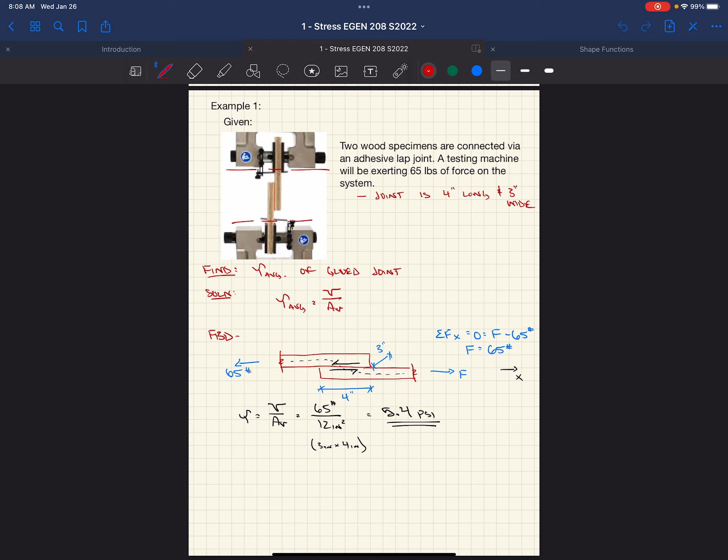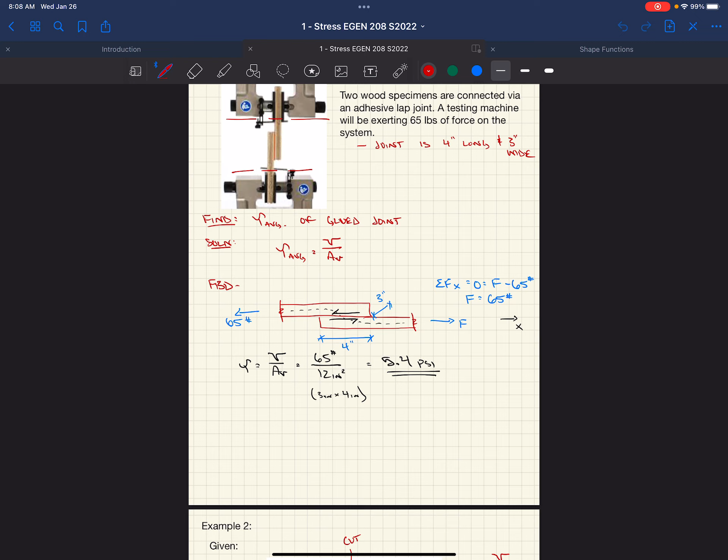All right, so on Monday we started talking about shear stress, right? The intensity of the force parallel to a cross-sectional area. Normal stress is the intensity of a force perpendicular to a cross-sectional area, okay? We went through an example. We had a couple glued pieces of wood glued to each other, with one shear plane, one location with which we have transfer of force parallel to a cross-sectional area. We calculated that we had 5.4 psi of shear stress, average shear stress, because we're assuming it's uniform over the entire cross-section, that entire area.

Then we started this example, which was a clevis. As I mentioned, you can find a lot of them in the engineering building or other buildings on campus, okay? We were asked to find the shear stress in the bolt.

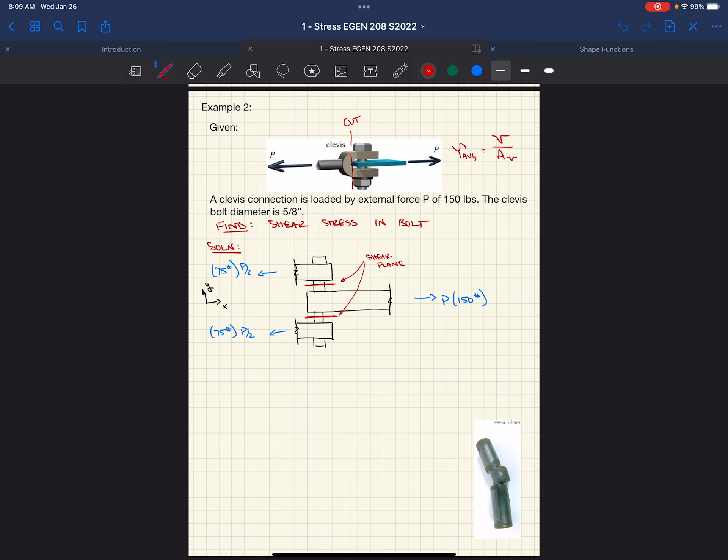So in order to do this, as we do in most of our mechanics of materials problems, we do a free body diagram, right? We need to know what the internal force is. That internal force then allows us to calculate the internal stress, or the intensity of the force, based on the cross-sectional area over which it acts.

So in this case, we drew a free body diagram of our clevis. I cut the clevis so you could see this force transfer through the center plate, right? We have a full force P. And as we run through the clevis, well, we have two sections of clevis. Because we have symmetry, these forces get split in half. So we have P over 2, or 75 pounds, acting on each of the legs of our clevis.

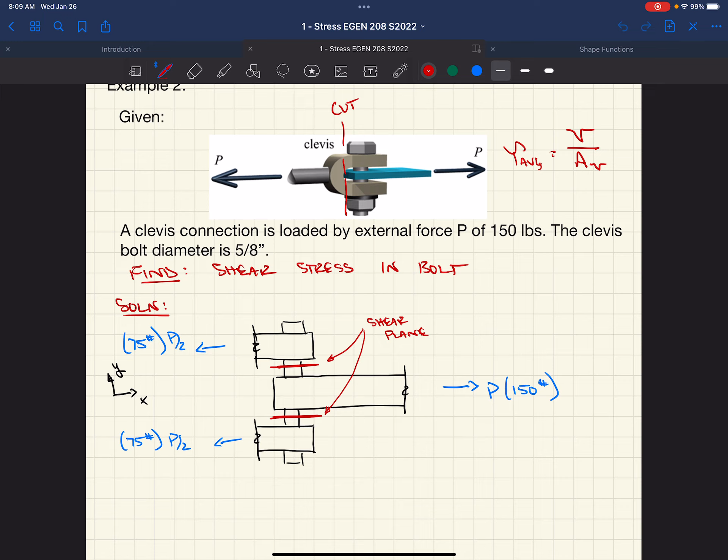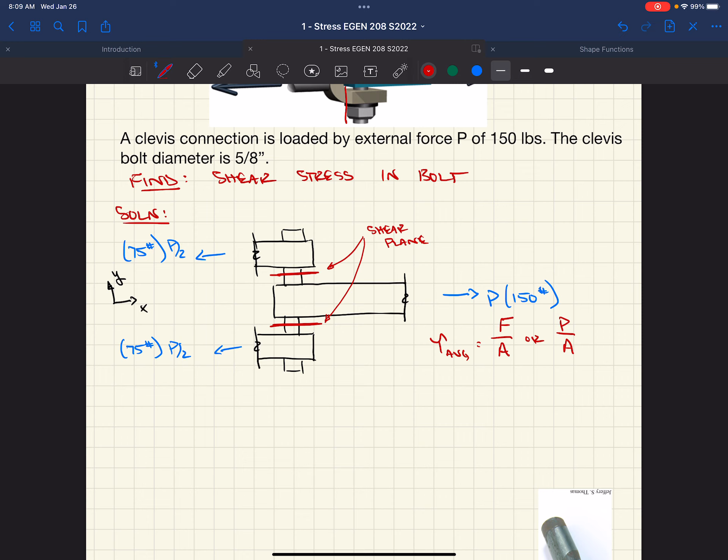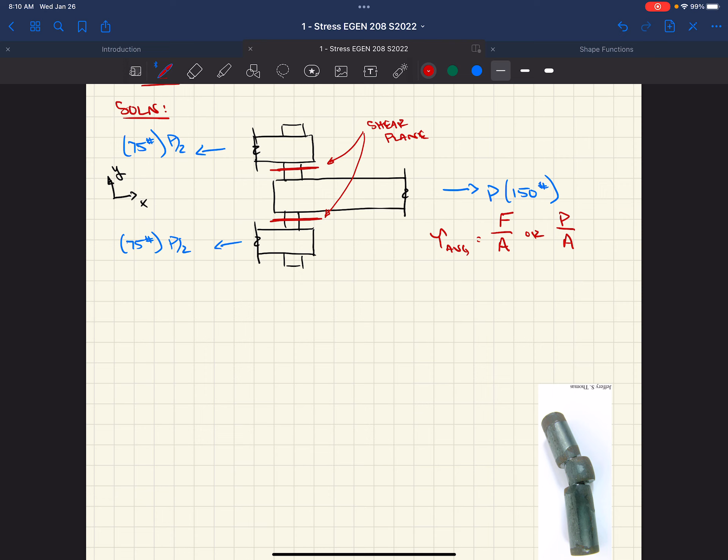From this point, right, now we have forces. We were given the diameter of the bolt, so we have area. We know we need to calculate shear stress, or P over A, right, force over area, the intensity of the force, stress. So we can calculate this in two different ways, right? We can calculate it with respect to the force being this P over 2, or the force being our entire P. Why is that? It's because we have two shear planes, so we could either cut out...

Another free body from this diagram. Right, cut off one of the legs of the clevis, and we're looking at what's going on right at our shear plane. We would have our force P over 2 trying to shear that bolt off. See if we can find a different color, right? Or we could look at a different free body, right, and look at both of our shear planes together. And hopefully we should get the same answer.

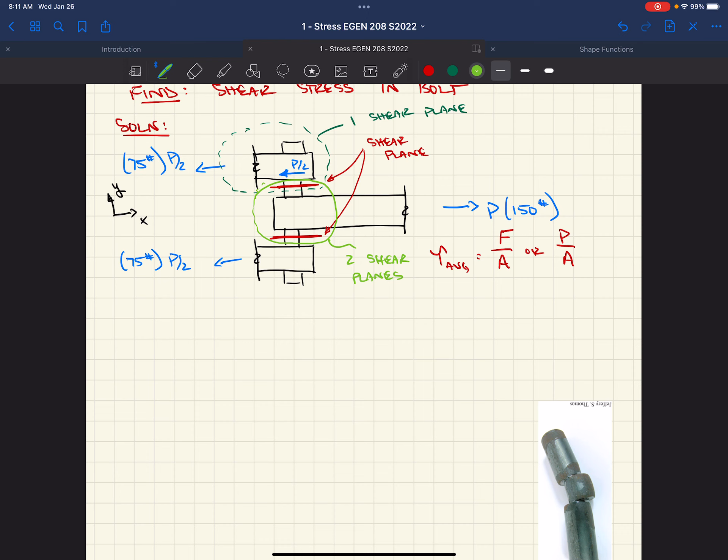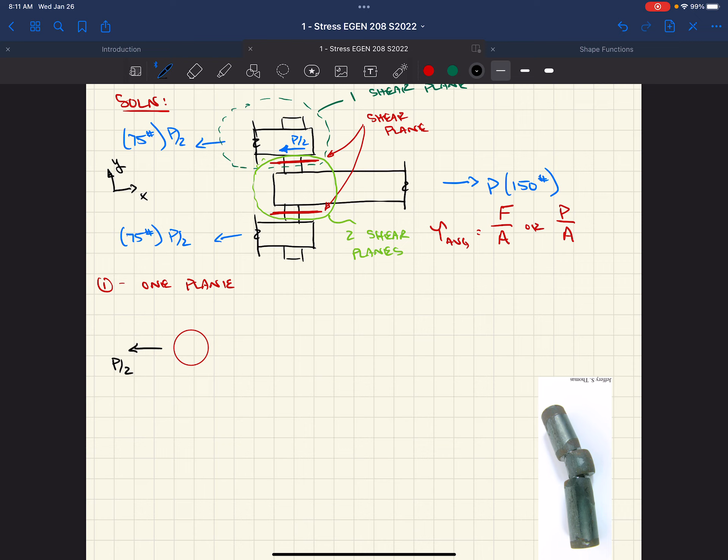All right, so if we look at first, right, one shear plane. Our free body diagram that we're looking at is that upper one, that upper circle there. If we looked at a cross section, right, we're going to have our force P over 2 acting on the bolt, right? It's our P over 2 that we calculated before. The bolt itself, it needs to resist that, right? So we've got a P over 2 acting on the other side of the bolt. That's our other P over 2 acting right here.

Something like that, right? We know the diameter of this is 5/8 of an inch. So now we have our force and we have our area. We can calculate our shear stress, tau, which would be our force, P over 2, divided by the area. If we know the diameter, it's pi over 4 d squared, which gives us 150 pounds, that was P, divided by 2, all over pi over 4 times 0.625, 5/8 of an inch, squared. We get 244.5 PSI.

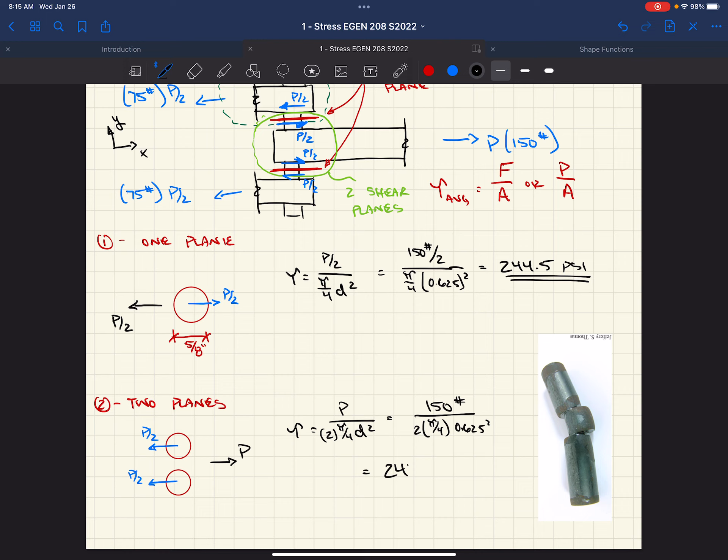So in this case, again, now we've got tau is force over area. Well, now we have our full P load, but now we have two shear planes. So we have 2 times pi over 4 d squared, which is 150 pounds, divided by 2 times pi over 4 times 0.625 squared. What do we get? We get 244.5 psi.

Right? So as long as the free body diagram is appropriate, yeah. Where are you getting the pi over 4? So the area of a circle with a diameter d is pi over 4 d squared, or it's the same as pi r squared, but you could do it with the radius. Not as popular of a method to calculate the area of a circle, but yeah, if you were to substitute 2r into pi r squared, you'd have to divide by 4 to get rid of that 2 squared, which was 4. So yeah, it's just force over area, as we've talked about, to get the shear stress.

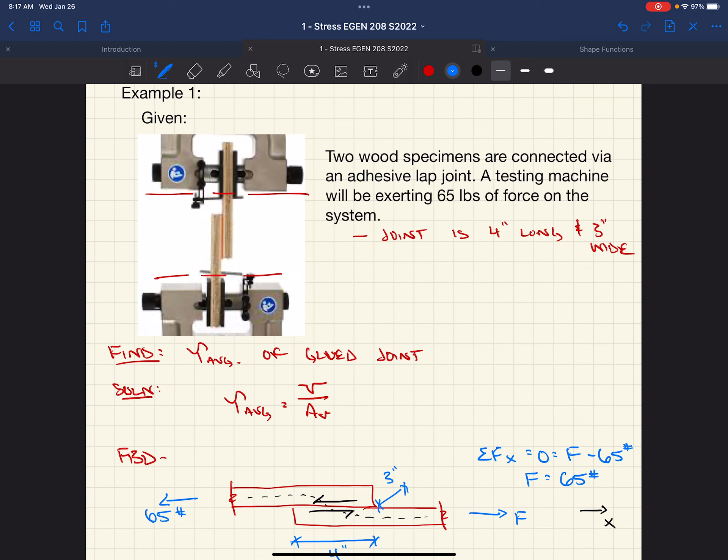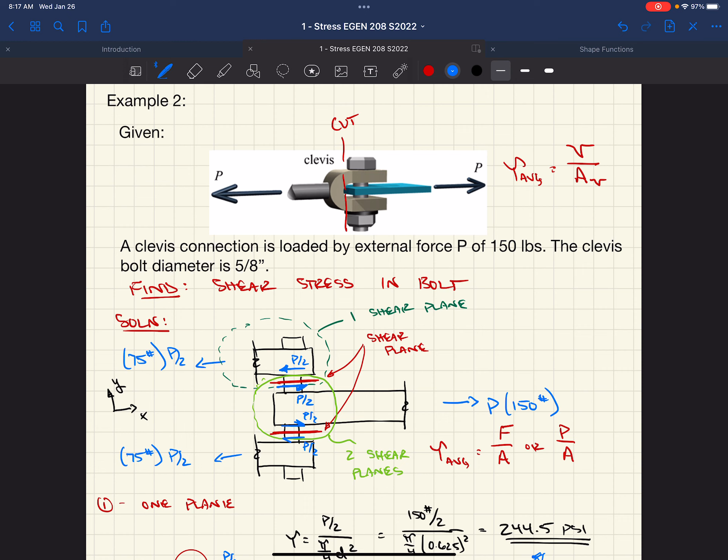You can either look at one of the planes, right, or you can look at both planes. In some cases we have only one plane, like our first example. This would be a single shear plane across the 2 pieces of wood. But as we looked at a different type of configuration, we've got 2 shear planes acting in this. You would say that this bolt acts in double shear. So this would be a double shear failure.

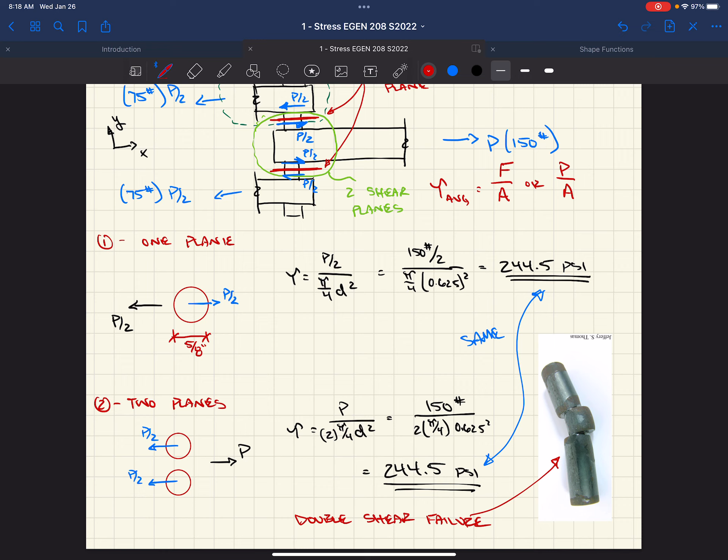You can imagine this clevis is acting on the outsides of this bolt, right? The plate is acting in the center. If you pulled hard enough, the stress is the same on both, so it should fail at the same time. It would just slide that inner piece of the bolt out from between the outer pieces, right? So that'd be a double shear failure.

In the homework, this is a type of connection that's in the connections on the second problem, okay? They're all double shear connections. So that means you have 2 shear planes, right?

Any questions about that? Yes. Can you just explain the cross-section free body diagram again? Just like the forces, on the single shear versus the double?

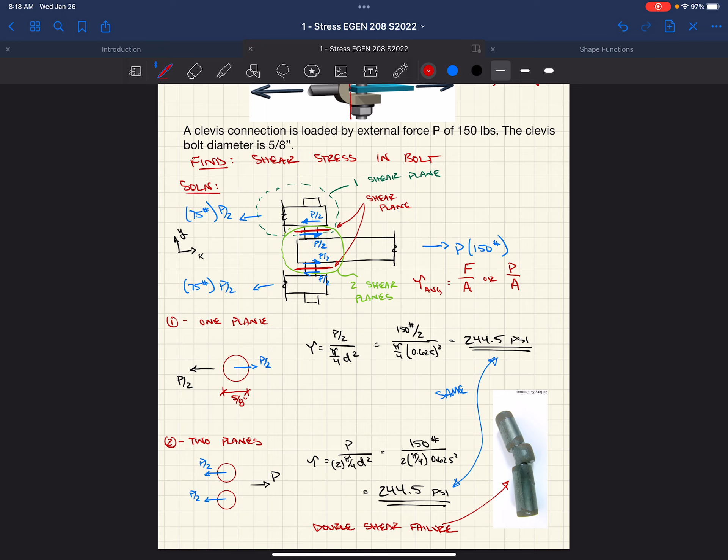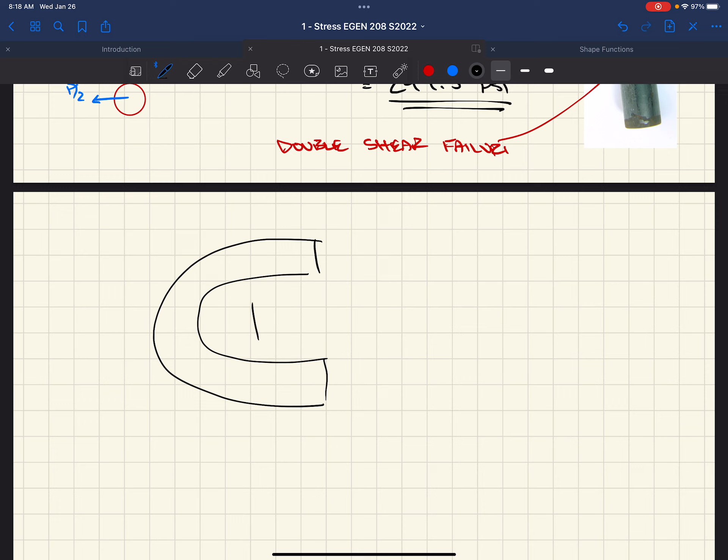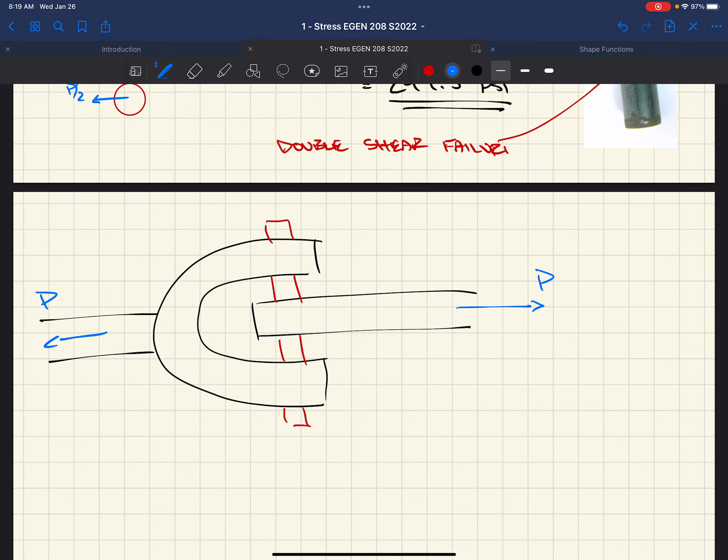1 and 2. Yeah. So if we looked at this, this is our clevis. This is our plate. And we had some sort of pin or bolt putting these 2 together, right? And we'd have some sort of load, P in this case, was our 150 pounds. So to pull out a free body diagram, we could legitimately cut this anywhere we wanted, right? That's the essence of a free body diagram. You're pulling out a free body, and you're imposing on that free body the forces that are acting on it externally. So this is a free body looking at the entire clevis connection assembly, okay, which has forces on the left equaling the forces to the right. So this thing can't move anywhere, right? If you did sum of the forces in the x. So anywhere that we cut this, we still have to maintain that same equilibrium.

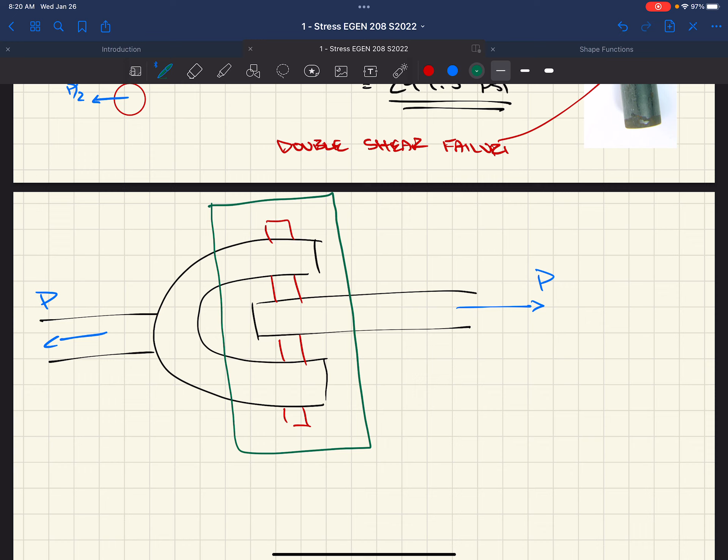So if we were looking at what we did first, we cut out this section. We'd say this is our free body diagram, number 1. And when we cut that out, it looked something like this.

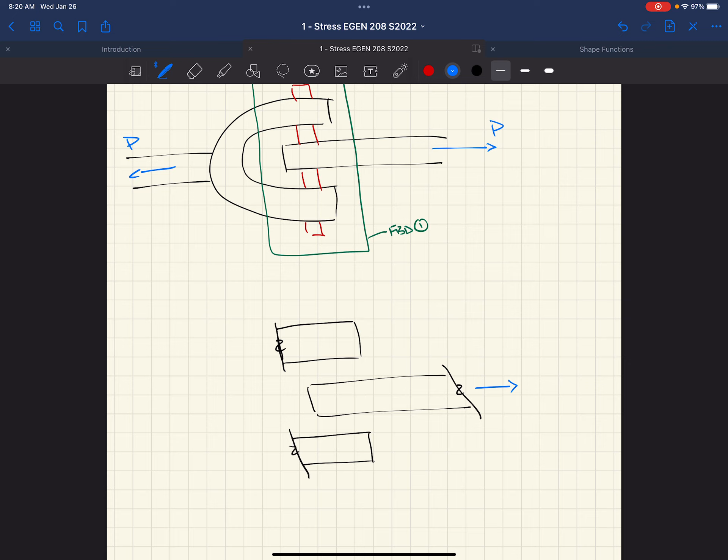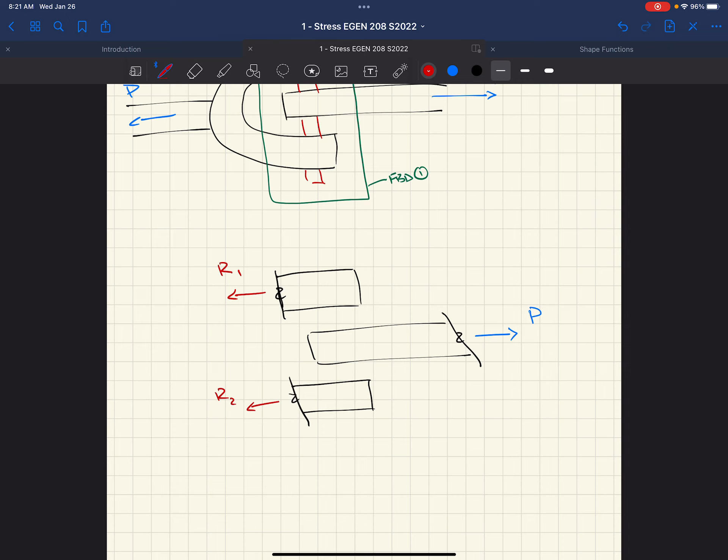Now we have P on the right-hand side, right? We know what that is. And then we have two internal reactions, right? We have two forces that are going to be in the yoke of our clevis, right? If we cut that clevis off right there, there's going to be some sort of internal force in the top section and the bottom section, right? So from there, we know we've got our bolt sitting here. We have sum of the forces and sum of the moments, right?

We need a coordinate system here, which I did not put in. I'm going to do X, Y, looks something like that. Okay.

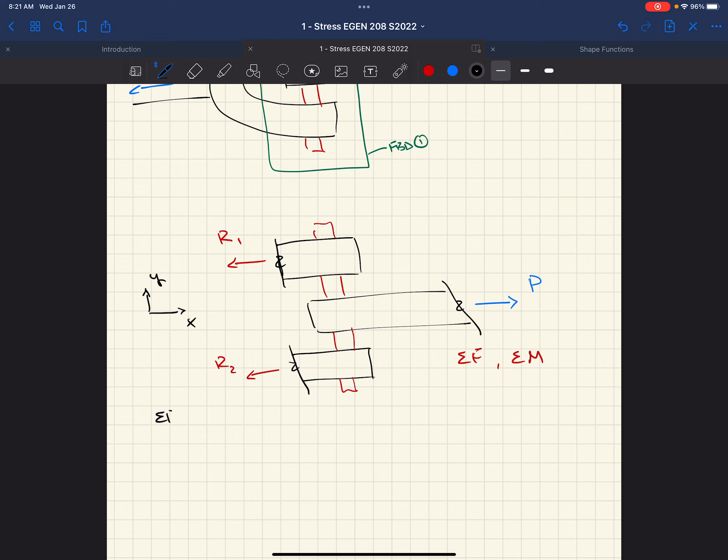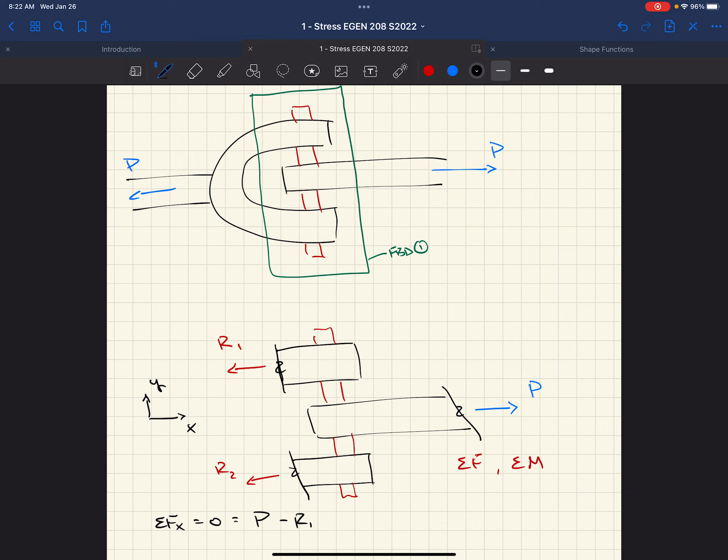Well, our forces are all acting in the X direction, right? So if we did sum of the forces in the X, they must equal 0, just like they equaled 0 in the overall free body diagram. So we got P to the right. Our coordinate X is positive to the right. We've got R1 to the left, right? So it'd be negative. And R2 to the left.

So we know what P was. We don't know what R2 and R1 were. All right, so we need an additional equation. All right.

So we need to use sum of the moments. So if we drew a line through here, right, we would have some sort of distance x that separates our two reactions in the yoke with the reaction in the plate, right? And the sum of the moments about any point on this free body diagram have to equal 0, right? And so I would say sum of the moments about, I'm going to pick a point right here. Maybe we'll call this point A. So sum of the moments about point A equals 0.

Well, if we use the right-hand rule, we can start with reaction 1. Curl our fingers in the direction of the force R1. We get our thumb pointing outward, so that'd be a positive. So I would say this is R1x, positive. P, we move down our free body diagram. P has no moment arm, right? No distance between it and this point with which we're summing the moments about. So there's 0 moment there.

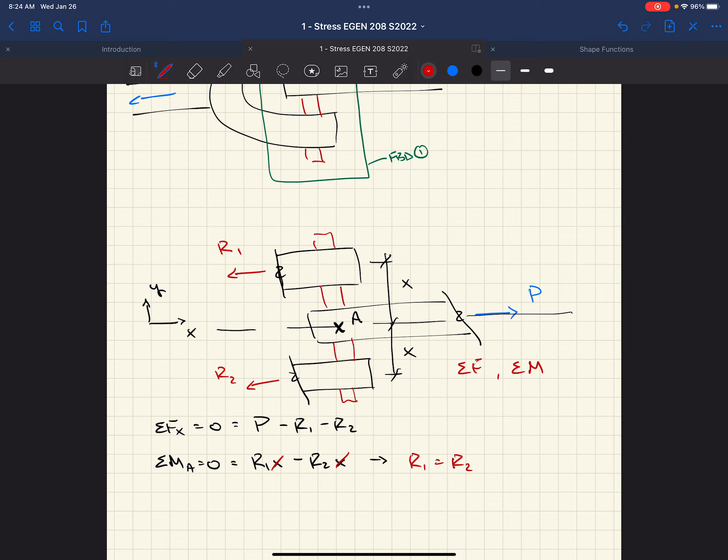Then we have R2, also times x, right? The clevis is symmetrical. So this distance x and this distance x are the same. So we end up with this equation that R1x minus R2x equals 0. The x's cancel out, and we end up just with R1 equals R2. Well, if R1 equals R2, we can sub R1 equals R2 in this equation. You end up getting P equals 2R1, or P equals 2R2. So you end up getting R2 and R1 equals half of P, right? So that's how we got our first reactions in our first free body diagram, right? That's how we got this free body diagram in the first place. I kind of jumped a little bit ahead there, okay, assuming some of that was coming back from statics.

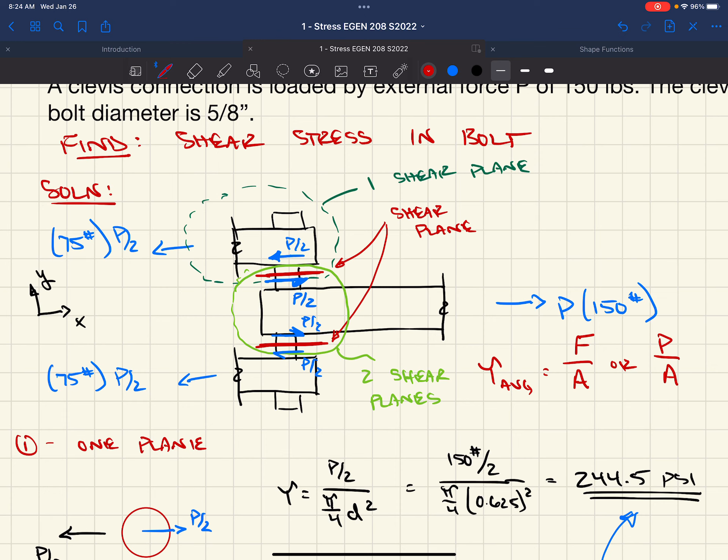Now when we look at our single shear plane or a double shear plane, right, now we're going to cut, I'm going to cut it something like this. Okay, this would be free body diagram number 2.

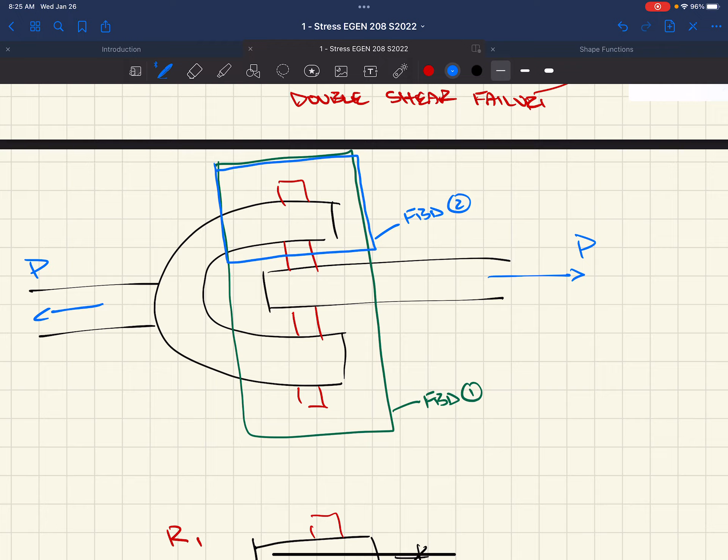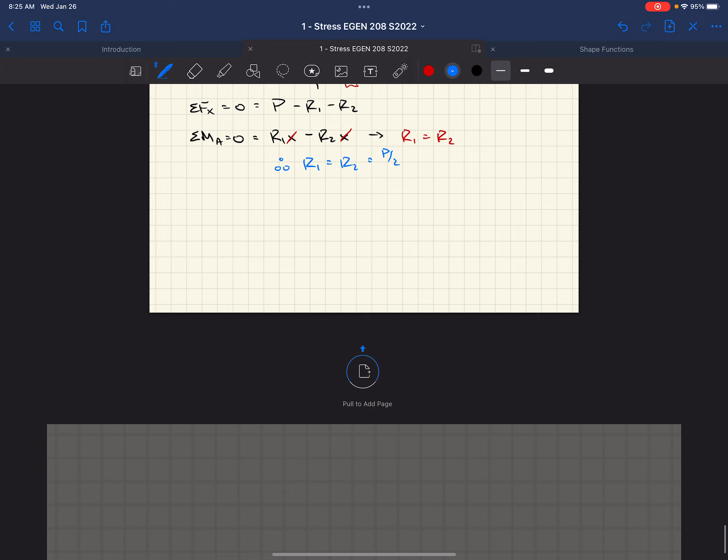So looking at our first free body diagram and knowing we want to just cut out this top portion, and we know that R1 now is P over 2, which I'll write that down here. Therefore, R1 equals R2 equals P over 2. So if we draw another free body diagram, this time we're going to draw just our top portion and do something like this.

We now know that we have P over 2 acting to the left. Well, we need some sort of extra or internal force, right? There's going to be some internal force in this bolt wherever we cut it.

Might call that reaction 1. We know that to maintain equilibrium, the sum of the forces have to equal 0, and the sum of the moments have to equal 0.

So sum of the forces in the x, if we gave ourselves a coordinate system x and y, we'd say 0 equals minus P over 2, acting to the left, which is in the negative direction, plus R1. I assumed R1 is acting to the right. We end up getting R1 equal to P over 2.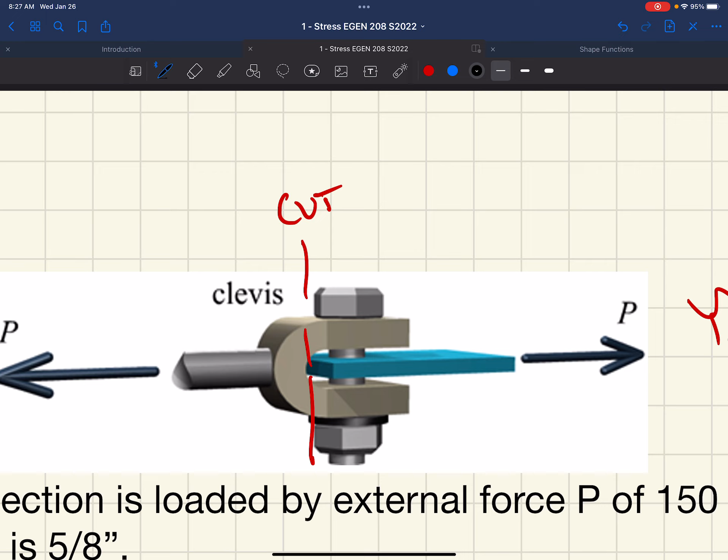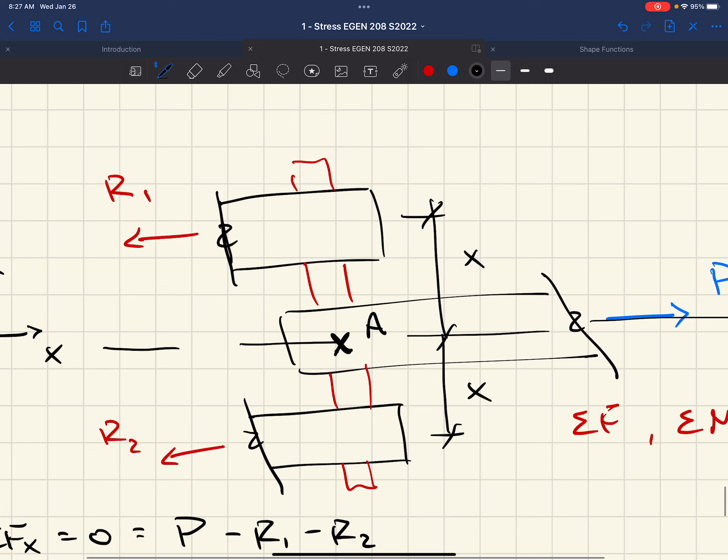Does that kind of help you out with where we get the first shear plane forces? Yeah, I was just trying to picture the one plane, like a circle. So I was looking at it like looking downward on the top, if you were to take this clevis and rotate it 90 degrees, and then you're looking basically from the top down on the top of this bolt. The visual you'd see would be a circular cross section where that bolt comes through. Does that make sense? And so similarly, we could do the exact same thing looking at now cutting this out.

This would be free body diagram 3. In that case, we know the reaction in this bolt, we know the reaction in the plate. The only reaction we don't know is the one that's in this bolt. Well, if this is P over 2, that's P. This has got to be P over 2 based on the sum of the forces in the X.

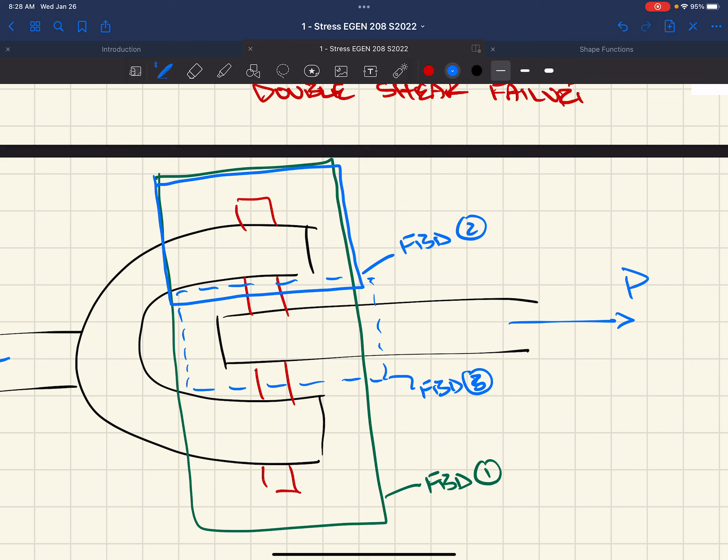Okay. Any other questions? That's great. Happy to run through whatever you want, okay?

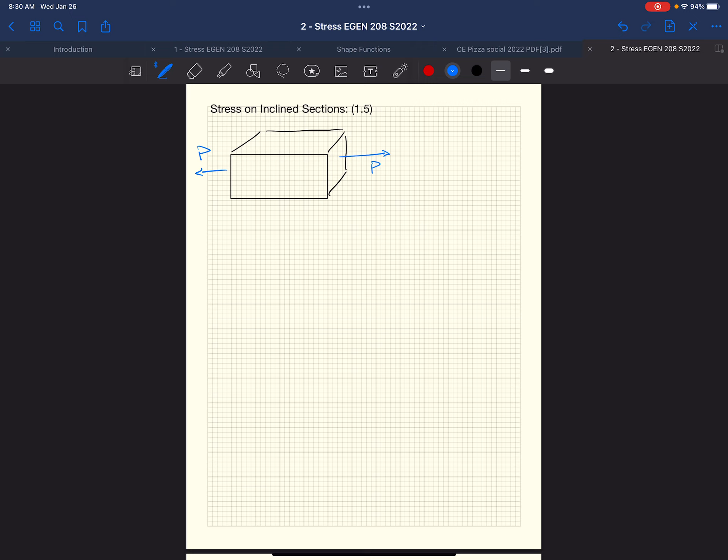So if we drew a square or a little box section here, what does that look like? If we had a block of material, and we applied some sort of force P to it. If we applied force P on the right-hand side, we'd have to apply a force P on the left-hand side to make sure we have equilibrium. If we had dimensions of this block, say it was D tall, and B wide, and had a length L, okay?

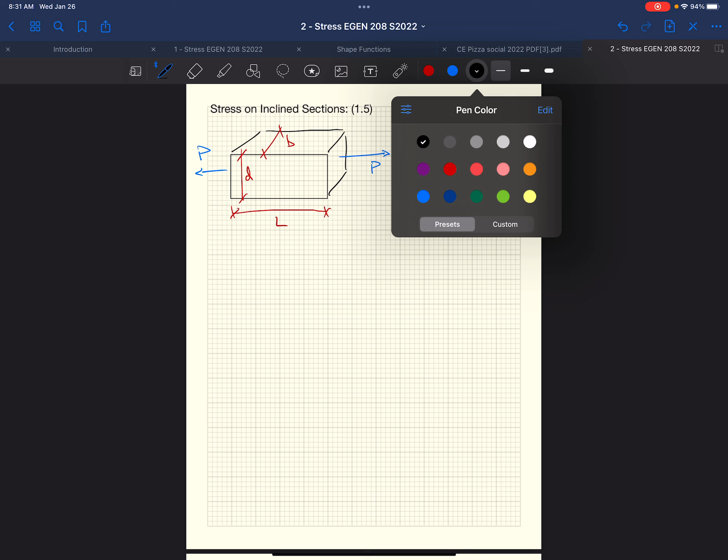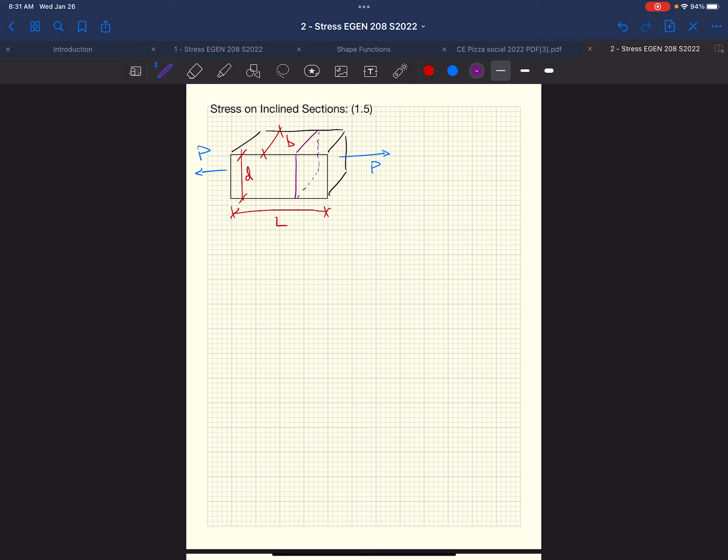We have calculated normal stress, which is the intensity of the force to an area that's perpendicular to the applied load. So what does that mean? We were looking at the stress on a cross section that looks like this, normal to our applied load P. Our angle here, which we'd call beta, is 90 degrees. That would be the area over which we'd calculate the stress if we were calculating normal stress. So normal stress, average or sigma average, is P over A, which in our case, for this block, would be P over the cross-sectional area, D times B. This would be normal stress.

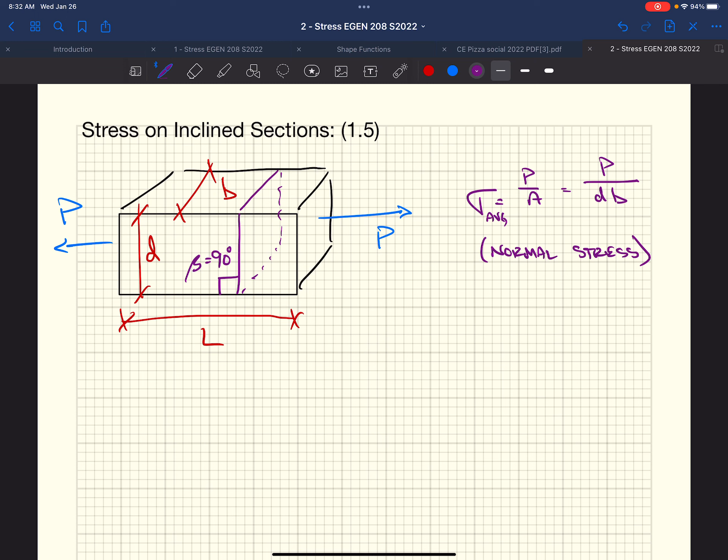We've also looked at shear stress. If we did another block here, let's assume it has the same loading. We've got P acting off to the right, P acting off to the left, same dimensions. Beta in this case equals 0 degrees. If our reference plane was the bottom of our block, we have 0 rotation of our plane when we're looking at shear stress. This would be the cross section that is parallel to the applied force, which we'd call tau average, again P over A, where A is the area parallel to the applied force. So now we have P over BL. This is shear stress.

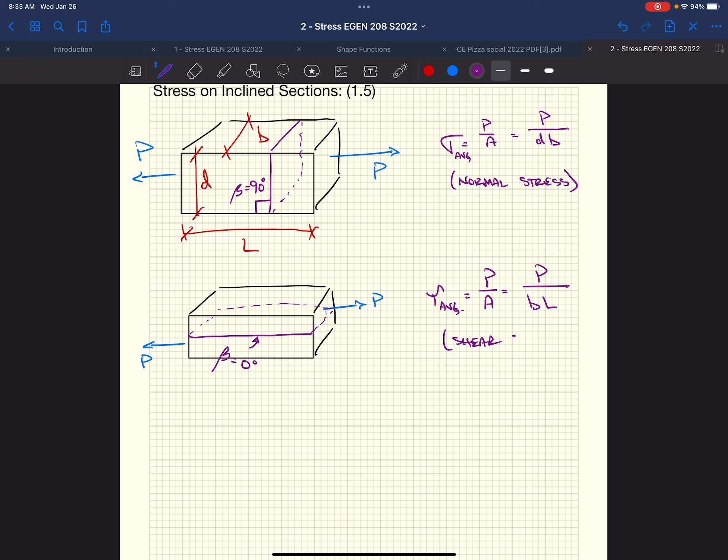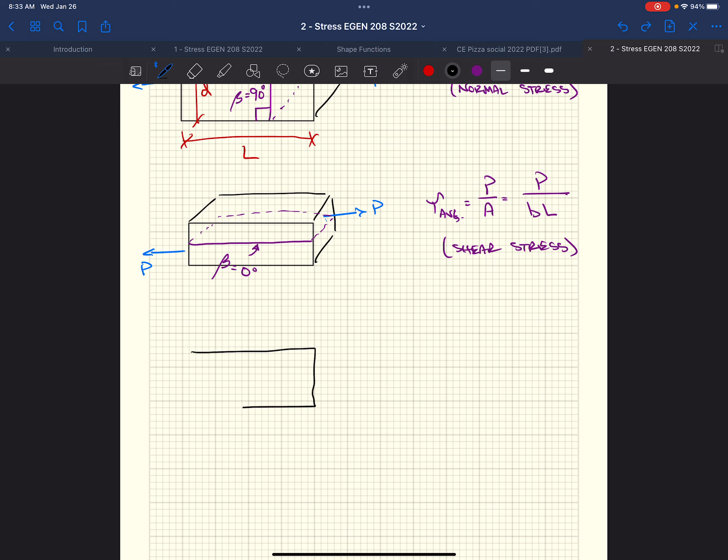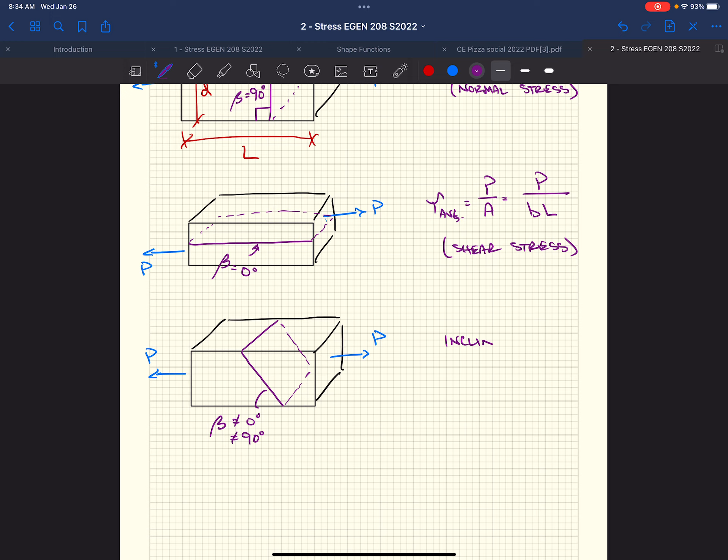Well, now what happens if we had the same dimensions, and we look at a plane that is not at 0 degrees or at 90 degrees, but somewhere oriented in the middle? So beta not equal to 0 degrees, not equal to 90 degrees, but somewhere in the middle. This would be an inclined plane.

Well, if we were to cut our section, our block, if you will, we drew a free body diagram. We plucked this portion, this free body out, the left-hand side of our inclined plane. We're going to have P on the left to maintain equilibrium. But that P we're going to find now has components that act parallel to the surface and normal to the surface. So sigma and tau now become components of our resultant force P acting at some inclined plane.

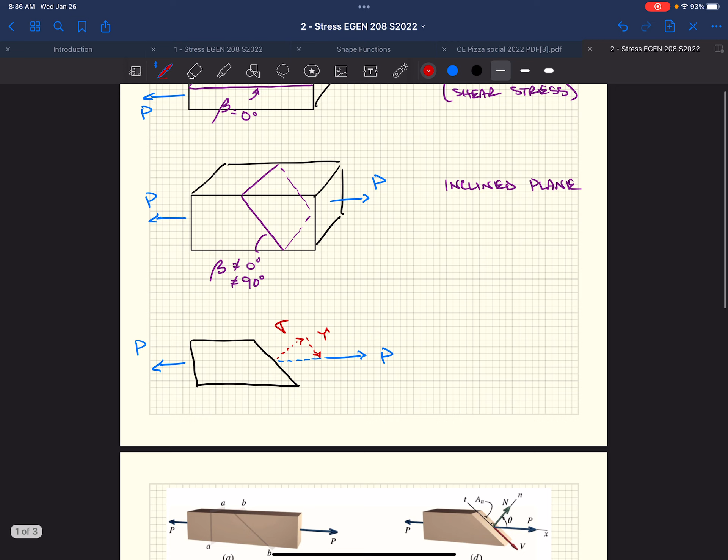So P has components of both sigma and tau.

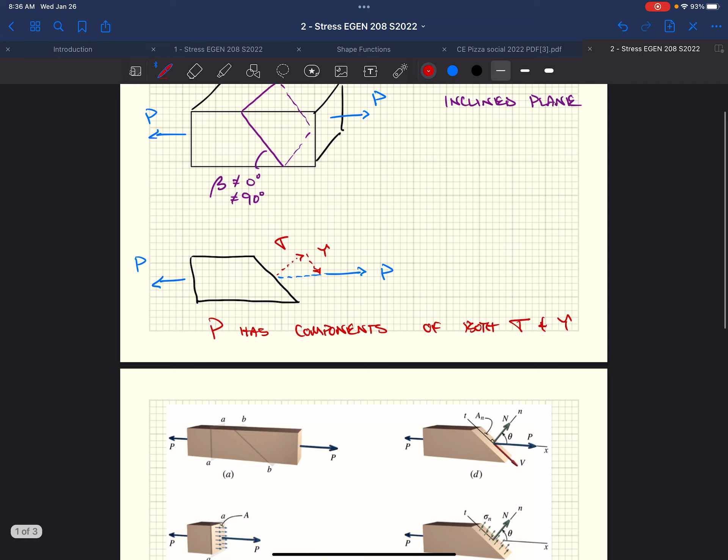What does that look like in a better presented slide? Well, it looks like this. This came out of the textbook. So if we look at part B here, looking at our block, we've got forces P acting on our block to make sure we have equilibrium. If we looked at a plane that was cut through this block, AA, we're going to have an area associated with a cross section now that's perpendicular to P, and because of that, we're going to get normal stress.

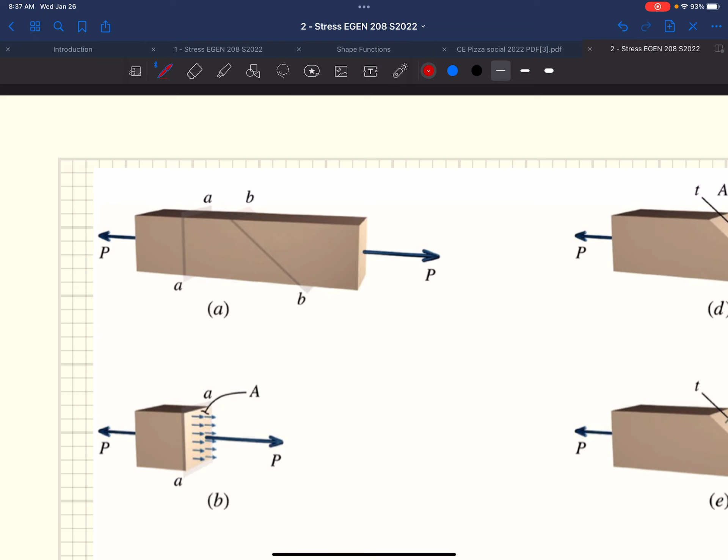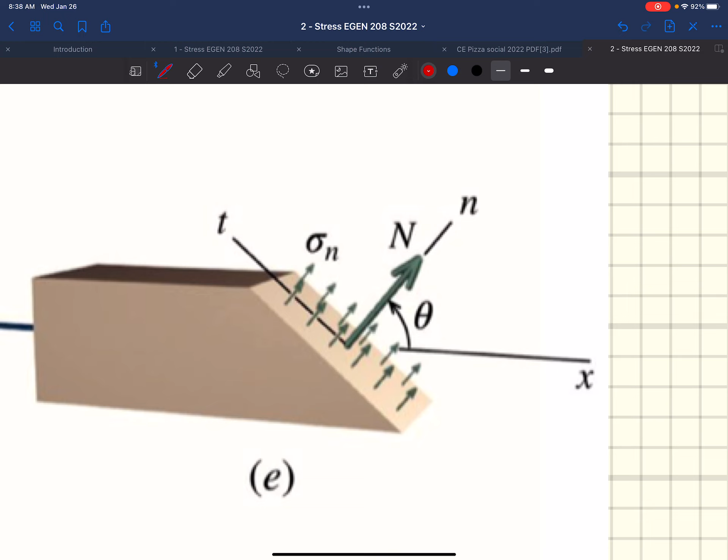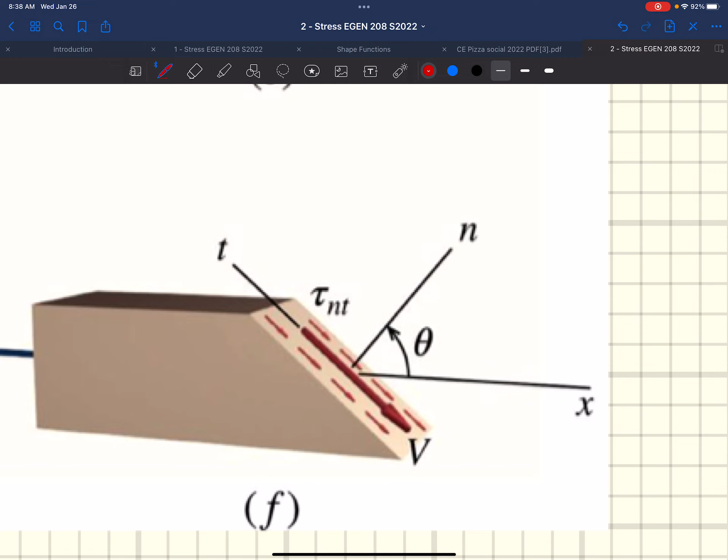If we look at cross section cut at BB, because our P is still horizontal, the resulting stress across this cross section is going to be horizontal, but that resulting stress has components that are both normal to the surface and parallel to the surface. So we end up getting this normal force and a shear force, which are components of our P, which create a normal stress. Normal stress definition: intensity of a force normal to a cross section, or an area. So we're going to get a sigma n, or normal stress, acting on our surface. And we're also going to get a shear stress acting on our surface, because we now have components of our P, our resultant force, that act along the plane and perpendicular to the plane.

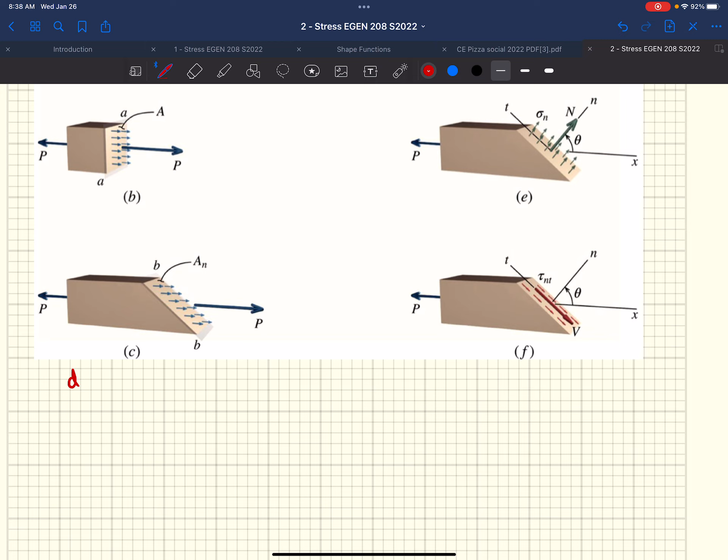All right, so for D, E, and F, P is broken into components of sigma, which is our normal, and tau, which is parallel.

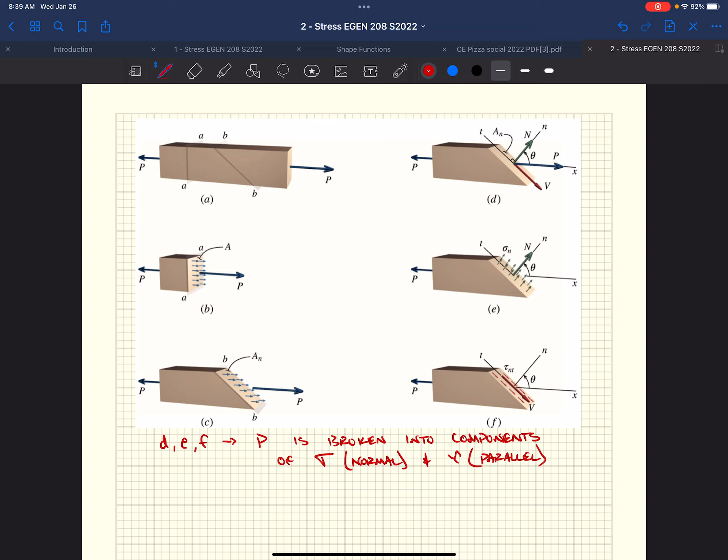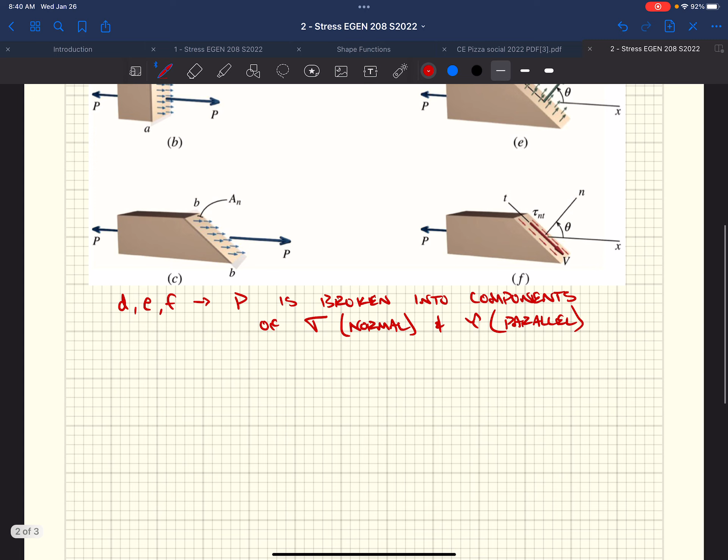If we were looking at this, and we wanted to know what N is or V is with relationship to P, what would it be? P sine theta. What would that give you, V or N? V, right. Opposite, the SOHCAHTOA thing, something you remember for the rest of your life for some reason. P sine theta gives you V, P cosine theta gives you N. So we've got N equals P cosine theta, V equals P sine theta.

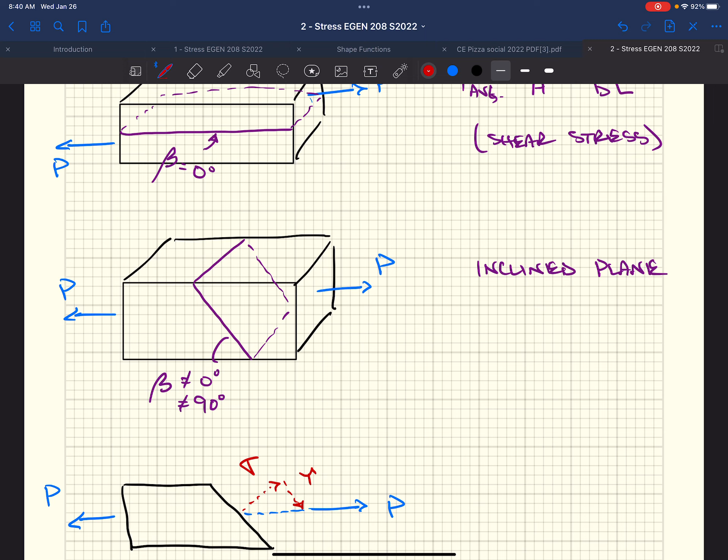Well, if you remember from up here, we had this other angle we called beta. Beta was measured to the horizontal on the back side of this plane. Well, if we draw in beta, beta would be then this angle.

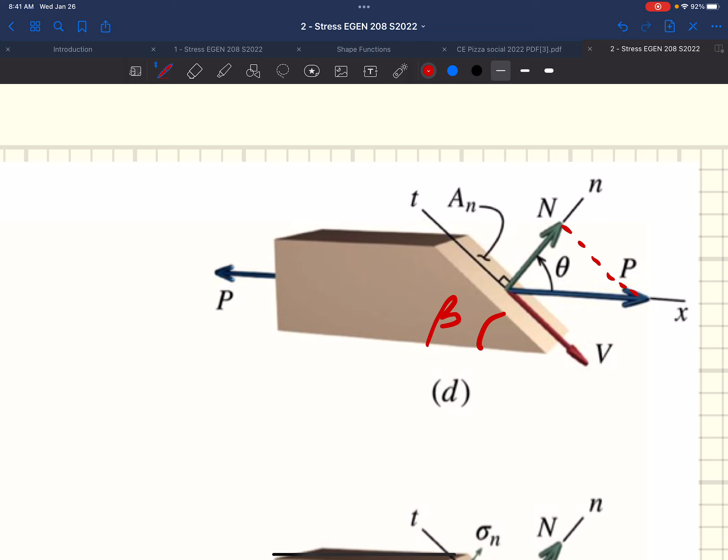If we wanted to find a relationship between beta and theta, any idea what that would be? If we knew beta, how could we find theta, or vice versa? They're complementary, right, so one's 90 minus the other. So we would say that beta equals 90 minus theta.

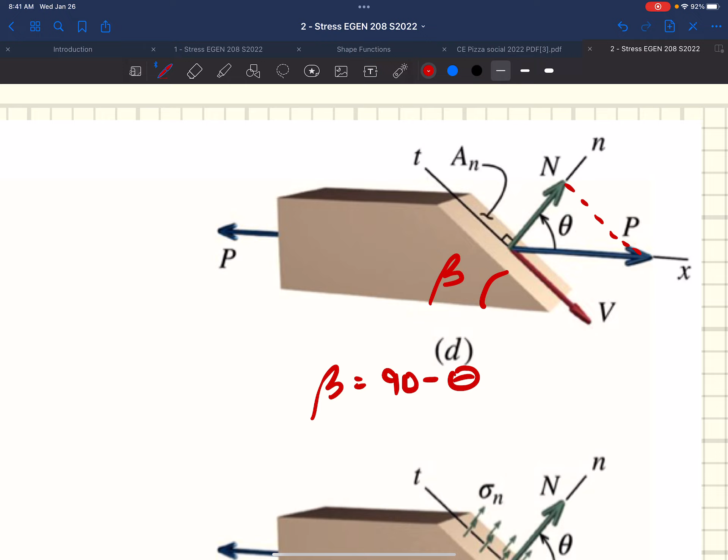Well, what does that mean about our little relationship we said here? Got a 50-50 shot. What's N? P what? Perfect. Woo, killing it today. Just opposite, right?

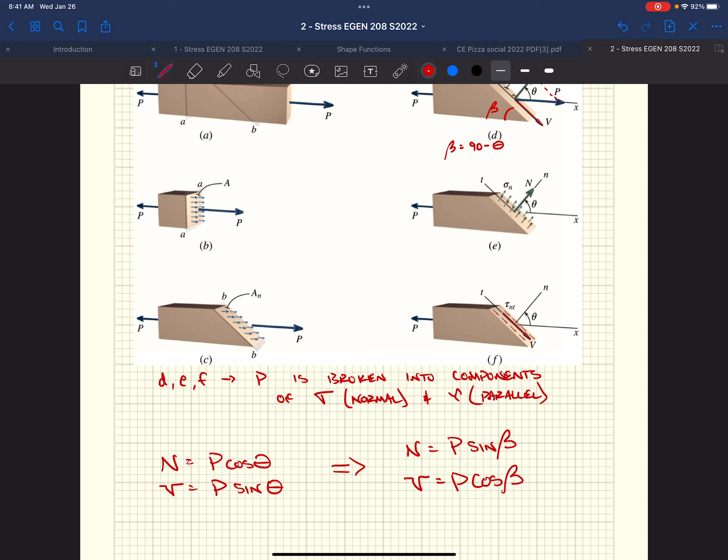Now you can do the homework, the last problem in the homework. But we're going to go through some more of this, a little more examples, okay? There's a little bit more to it.

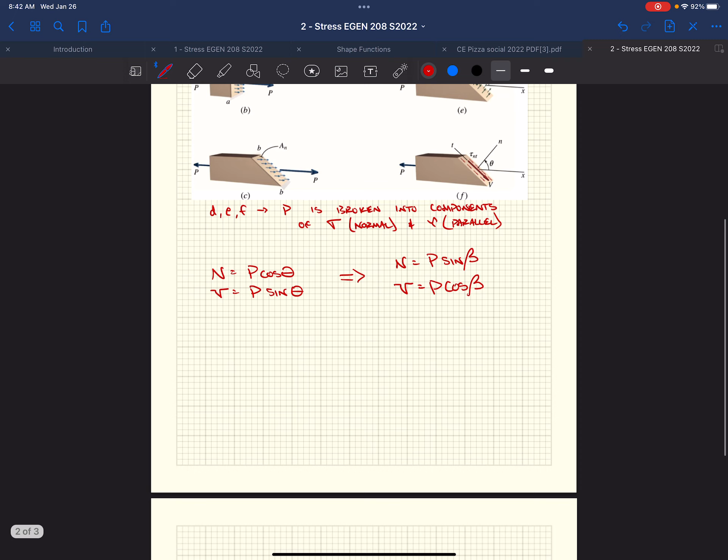So if we're looking at this now, we can figure out what our forces are, N and V, normal force, shear force. But stress is a function of force and the area, so we no longer have this simple height times the width. Our area is going to change as we have this inclined surface. It's going to get bigger the shallower that angle gets, and it's going to stretch longer and longer until finally, when beta equals 0, it's the full length of our block. So it'll go from the depth to the length, times the width.

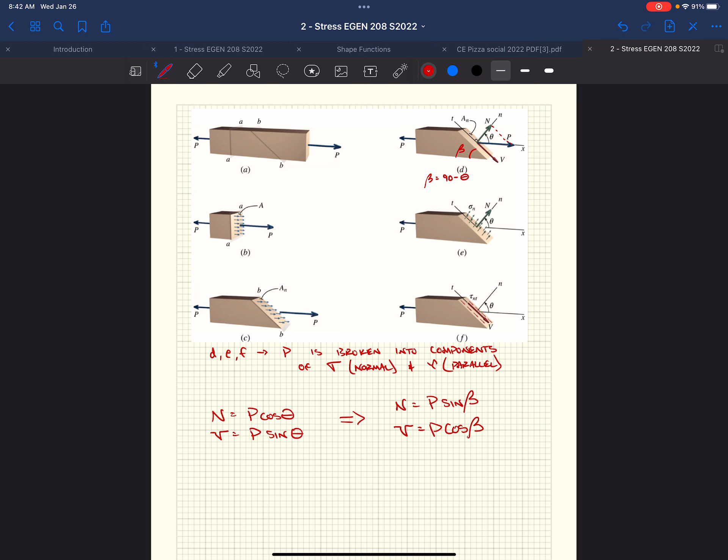So if we look again here, we'll start with another block.

We have some forces P on it. We had a dimension D, and some dimension B, width B.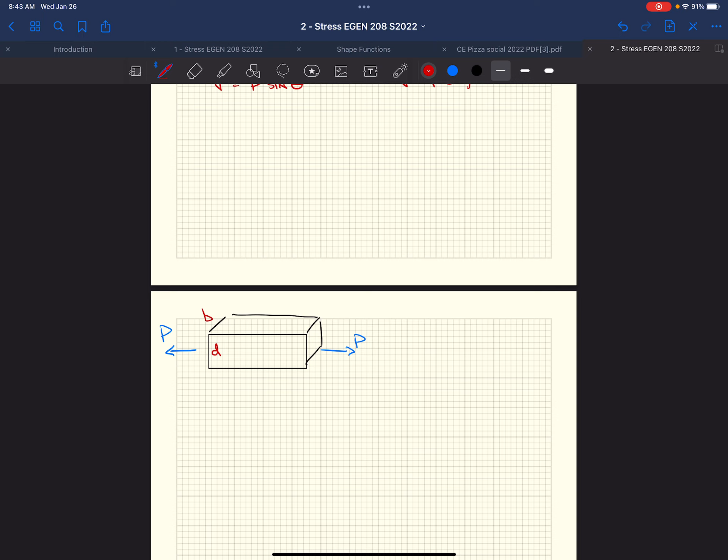If we cut this, and a length L, if we cut our block at some incline, and we wanted to know what is the shear stress and normal stress along that incline.

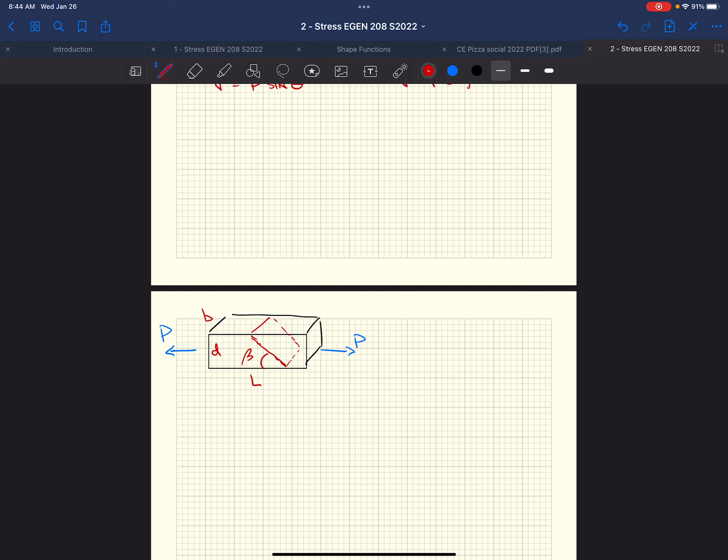Why the hell would we even cut the block like this in the first place? Well, a lot of times we glue stuff together, we weld things together, epoxy things together. So we don't always just do a butt joint, putting two things straight up, normal forces together. Sometimes we don't just lap things together. We might have to weld things at an angle, or glue things at an angle. So we want to know what the stresses are along that plane, maybe a connection plane.

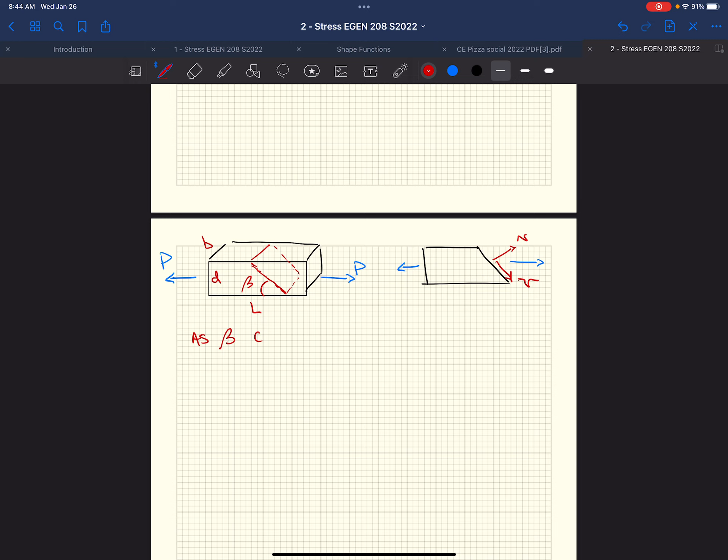So if we look at that cut, now we again have our normal force, our shear force acting along that plane. And as mentioned, as our beta changes, so does the area.

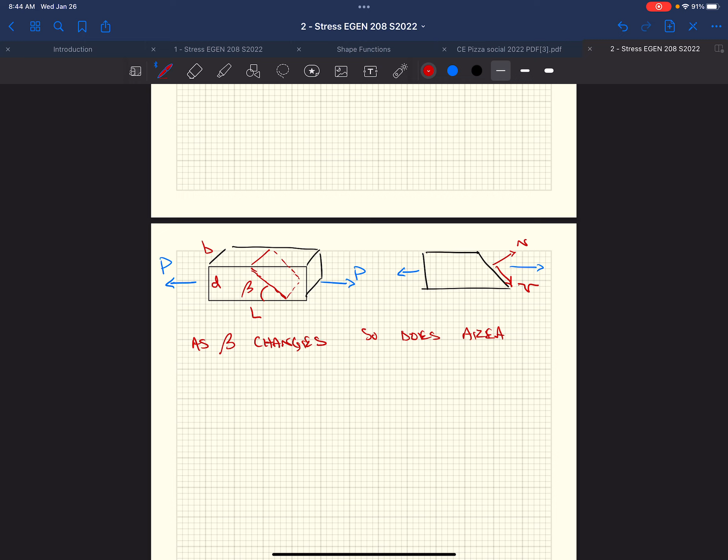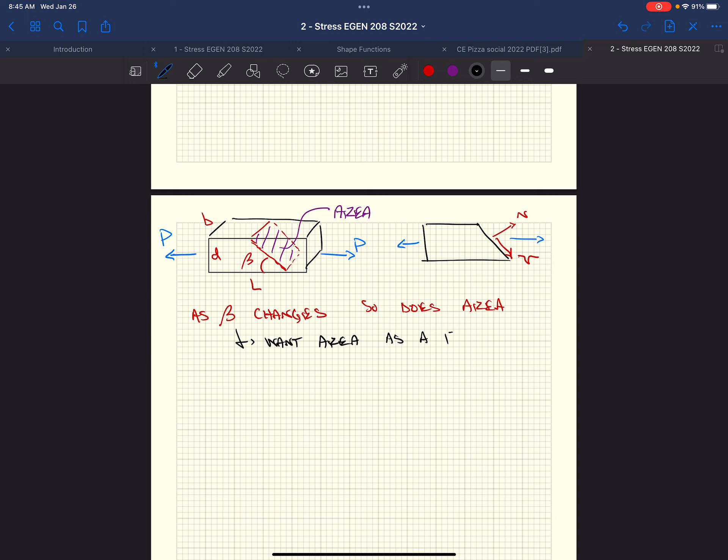If we looked at the area of that cross section, which we need to not only calculate our shear stress but our normal stress along that inclined plane, we really want area as a function of beta. We want to just be able to look at an inclined plane, say beta is 35 degrees. If we know what the length of our block is, the height of our block, and the width of our block, and the force in our block, we can figure out our normal stress and our shear stress.

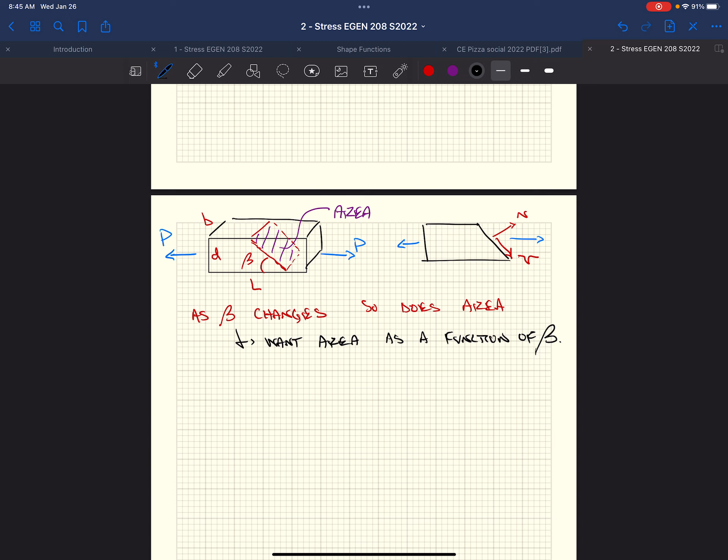All right, so if we take another section out of our block, if we looked at just an incline, which now becomes a triangle, if we were to just cut out this little section of our block, it would have a height of D. No matter what, as that incline cuts, it's got to cut through the entire cross section, so the height of that triangle is always going to be the height of our block.

We've got to cut completely through it. I'm going to call this H, which is the length of our cut. Area being length times width, we want to know what the length of that plane is, H. Well, from trigonometry, we could say that H is D divided by the sine of beta, because H sine beta is D.

So H is D over sine beta. Well, if we wanted to know what the area of that cut cross section is, it's going to be the length of that cross section times the width of that cross section. So we have B times D over sine beta, that's the width of our block is B, and the length of our inclined plane is D over sine beta.

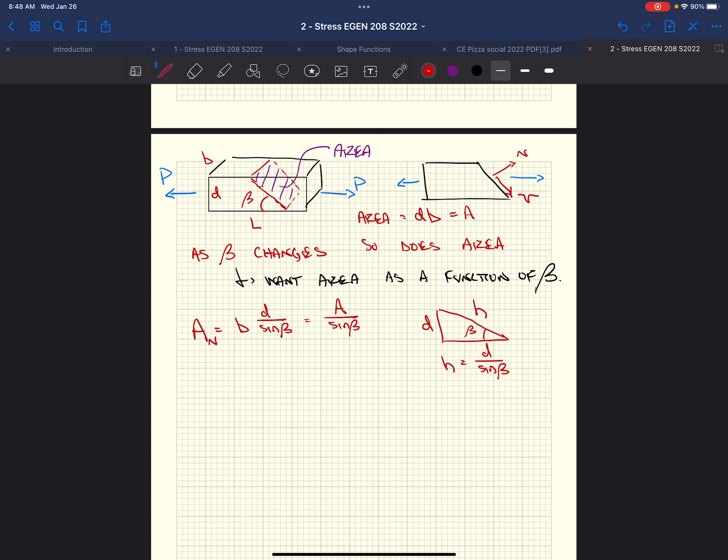Well, now that we know the area of our incline, and we know what our shear force is and our normal force is -- you just substituted B times D as A, yes, like I just drew it right there. Right, so the area of our cross section is the width times the height, B times D.

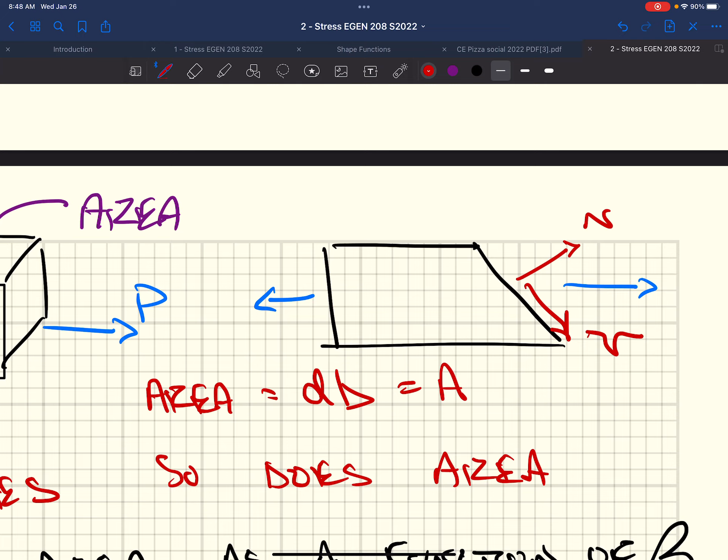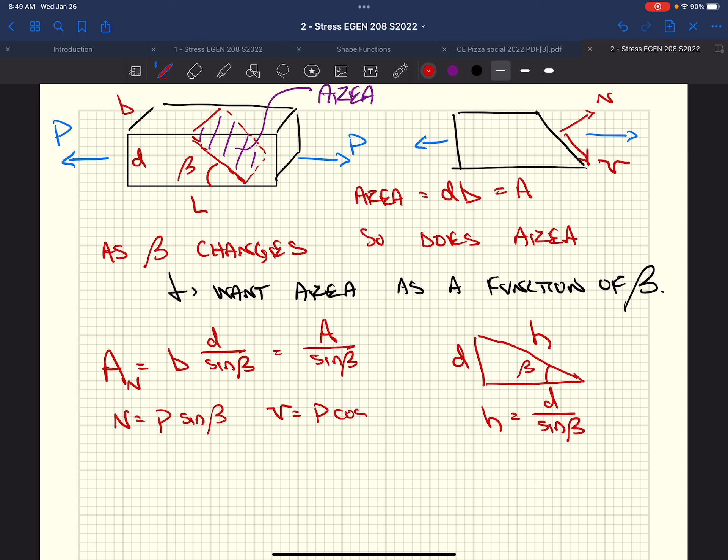So we know from up above, our normal force is P sine beta. Our shear force is P cosine beta.

Well, now that we know the forces, normal force and shear force, and we know what the area of the incline is, A sub n, we can figure out all of our normal stresses. Sigma n is N over A sub n. This is P sine beta over A over sine beta. We end up with P over A sine squared beta.

This is the same as saying P over 2A, if we do trig identities -- you guys remember all that, right? Not expecting you to know that, but just know that this is the easiest one to do on your calculator: P over 2A times 1 minus cosine 2 beta. That is our normal stress on an inclined section with angle beta.

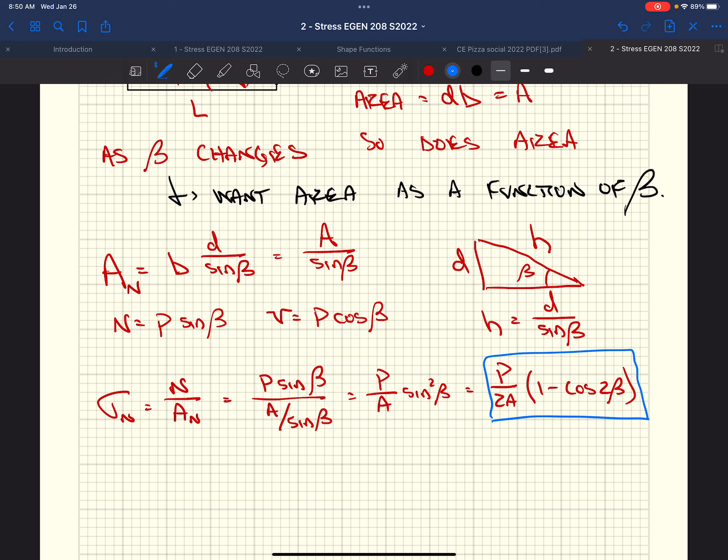And here, so that you guys have it: A sub n, tau is V over A sub n, which is P cosine beta, again over A over sine beta. Get a bunch of stuff: P over 2A sine of 2 beta.